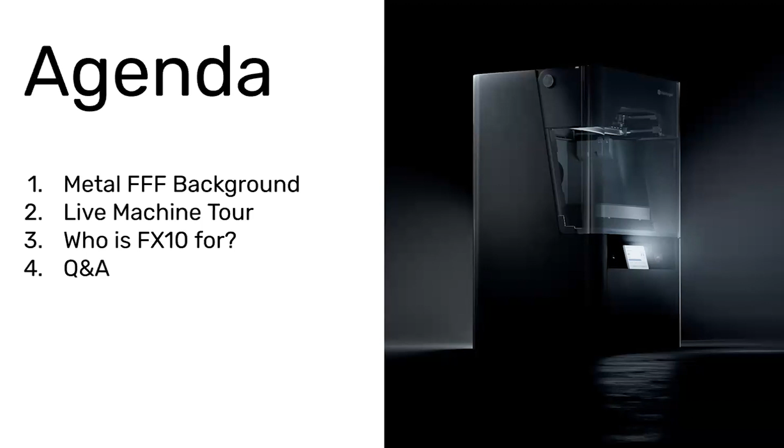But yeah, first to you, Nick. Yeah, so a little bit about how we got here. When you look at what had been available for metal 3D printing before we started doing metal filament-based printing, it was all million-dollar machines that take up large rooms, have major facilities requirements, big beds of loose powder. So there was PPE that had to be involved. It was difficult to make the process safe. It was a huge investment. We saw, as we were focused on providing solutions for the factory floor and powering manufacturing operations with tooling, jigs, fixtures, and MRO, that there was a need for lower cost systems that were safe, simple, easy to use. So that's what led us to invent metal filament-based printing in the first place.

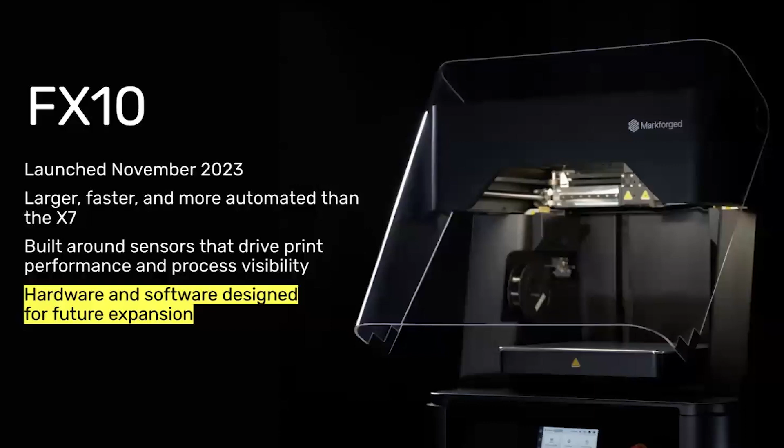FX10 is our latest hardware platform with sensorization, enhanced hardware that allows us to whip around the gantry faster while maintaining accuracy, and a host of automation features. We launched this to the world as a composite printer at Formnext last November, and now coming here, we're making good on the promise we had been communicating. Last time Daniel and I spoke about the FX10, we talked about how we really made it future-proof, but being pretty tongue-in-cheek without really exposing exactly what was going to come. Now Harrison and the team have made it real so that we can talk to you today about printing metal and composite on the FX10.

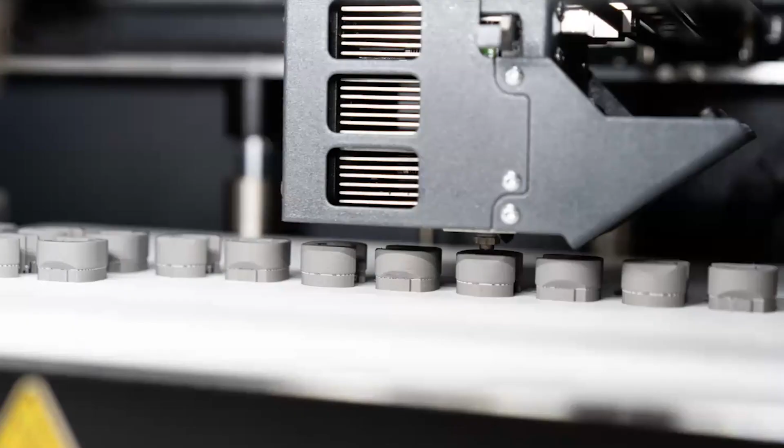So when we said hardware and software designed for expansion, modularity, and all these things, we're specifically talking about this - moving from just a composite machine to a machine that can do both composite and metal. Where I think we're really going to see the value come through is being able to expand the applications you're able to go after on the factory floor. We've seen a lot of customers over the years go through this journey of starting with industrial composite machines, starting with an X7, realizing the power that can now be harnessed with functional parts used for tooling and holding thousands of kilograms by adding fiber reinforcement, and starting to push that and move into metal over time when they started to see A, the value of additive on the factory floor, and then B, that there were applications they couldn't go after yet because they needed even higher performance with temperature, higher strength, corrosion resistance, wear resistance - applications that simply required metal.

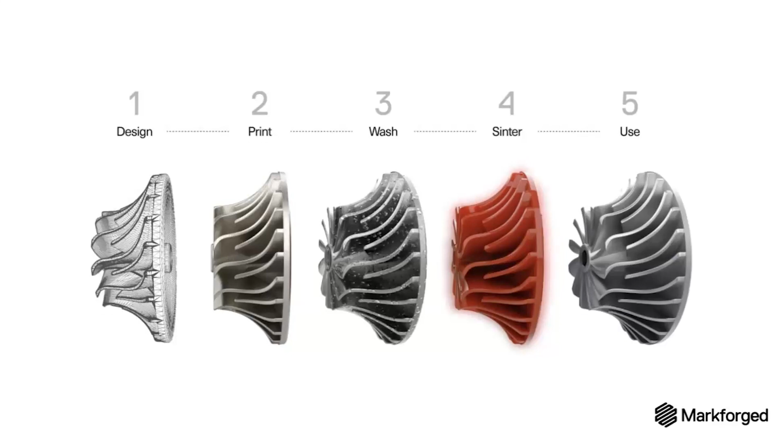And the metal process that we use here is really a 3-step process: printing, which starts with the filament that we have here. That's a metal powder that's bound with a wax binder, so there's no actual loose powder. You handle it with your hands, you don't need any kind of PPE. You load it into the printer just like you normally load a spool of filament.

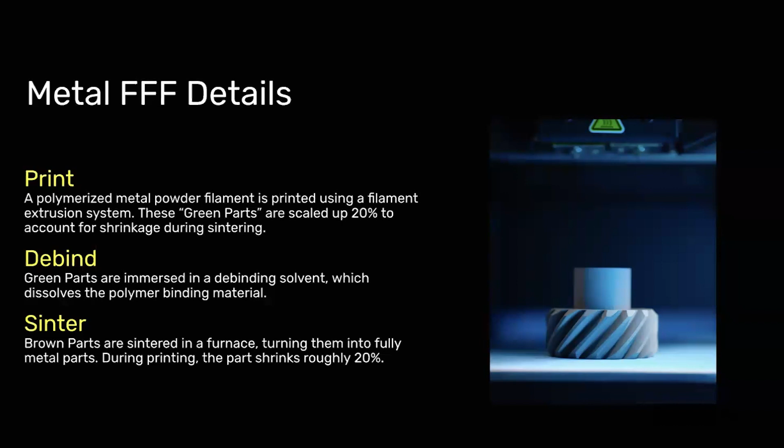After printing, which is the same FFF technology you're used to, where it's a lot like a glue gun on a gantry going layer by layer depositing filament, you have this green part where it still has the wax binder inside. We have two additional steps after that: the wash step, where we use a solvent bath to wash away 98% of the wax binder still in the part, and the sintering step, where we utilize our furnaces to basically cook that powder metal part into the final metal part.

You'll notice here there's a scale factor with this. These parts are the same part, printed and sintered. That's because parts of that filament are not metal, so as you sinter, the part actually shrinks about 20%. The most common question we get is, do you have to account for that? The answer is no, we scale it up for you.

But yeah, so this is the system: print, wash, sinter. We've been selling this package for years now and have built up a lot of experience with it. Previously this was with our Metal X machine, a system specially made to print our first generation of metal filaments. There was a lot of innovation that went into that which Harrison and the team were able to port over and power up in the development of the FX10 that we'll definitely dig into.

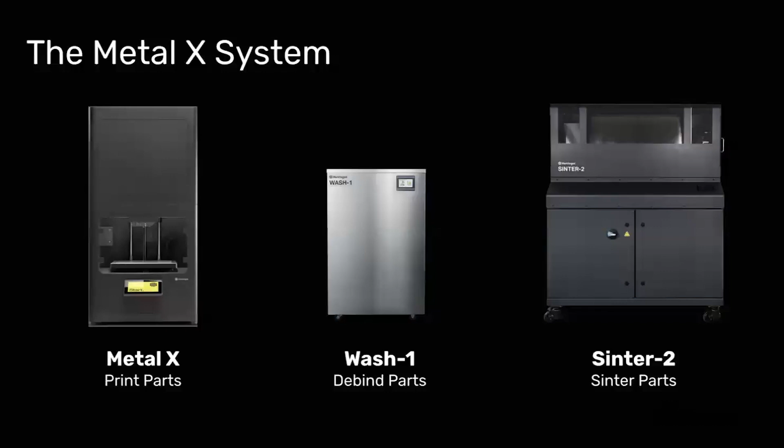That wash system right there, that's where the solvent bath is. And then the Sinter 2, that's our high running sintering furnace, where we're running at high temperature and controlling the gas flow that goes in there with inert gas, and that's ultimately what gets you to that final metal part. So, a three-step process.

I'll note that the Metal X, while being highly specialized, was developed as an offshoot of composite printers. So we started with this as a composite printer company. The metal kind of came away from that and became its own thing. And the real reason for that had to do with the feedstock itself, right?

Yeah, absolutely. When you look at the process, print, wash, sinter, you'll probably recognize this is a page out of the book from metal injection molding. In that case, the only difference is the actual printing process. When the team here first developed metal filament, that was a huge challenge, and one of the things that came out of it was the material itself was quite brittle in raw form. You can see it up above the printer in the chamber here on the Metal X.

Harrison, why don't you tell us why the filament is up top, how that helps with the Metal X, and what's different now? As a lot of people probably know, composite material is moisture sensitive, so it obviously wouldn't work in the setup we have pictured here above the heated chamber where you're printing parts. On the Metal X, the system was set up that way because you needed the filament to feed directly into the printhead. Otherwise it was too likely that the filament would break because of how brittle it is.

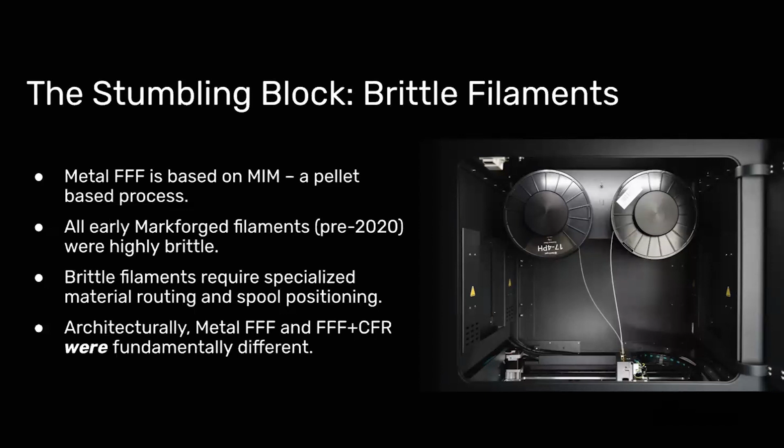This kind of answers the question a lot of people have of, well, why haven't we done this in the past, why haven't we had a composite and a metal system? It's because they were basically incompatible with each other. You couldn't put composite filament that's moisture sensitive in the chamber above where you're printing, and you also couldn't put metal filament previously in a spool bay or a Pelican case, because it would break in the path as you were trying to print at those speeds.

So when you think about this, it started as an evolution of composite printers, but what became is something totally on its own, and we spent years figuring out how to print this. At some point we realized that MIM feedstock, which is optimized for pellet form—super easy melting, running into mold, super high volume—isn't necessarily the exact same. We happen to have some pretty great material scientists here, so we pursued our own solution, right?

Yeah, exactly, and that's Daniel talking about our V2 metal filaments. You can see here they are dramatically more durable, even just in filament form, being able to tie it in a knot like this. This exceeded our expectations when we set out for development. There were a few pain points we wanted to solve with that first version of the metal filaments—since it was brittle, you had to be really careful even when you were just handling it out of the printer.

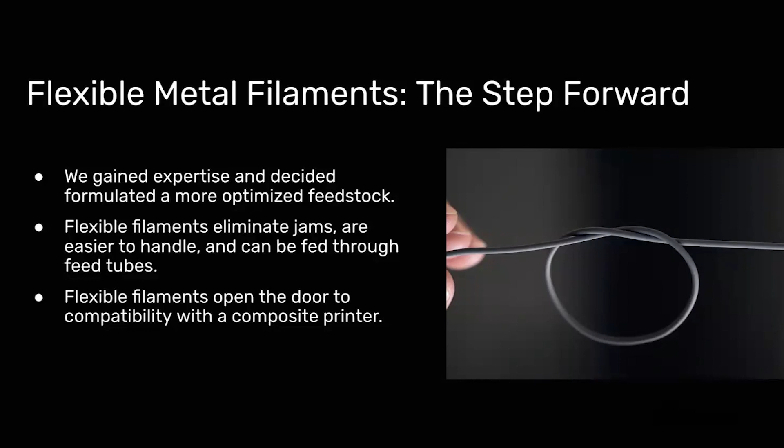And when you saw it in the upper chamber on the Metal X, it also had to be heated. We would preheat it so that it would be a little bit more durable, and that's what allowed us to print it at all. But now it's much easier to handle and much more durable, so it can be more robust for the printing process. And I know that was critical for your team, Harrison.

Yeah, absolutely. I think one of the biggest challenges we faced is how do we take this filament that's kind of like a rope, how do we feed it into a head effectively, and how do we make sure it stays intact so we can print fast parts without breaking this filament, or breaking the final part. This step towards these flexible filaments was a big and necessary first step in that process.

Yeah, and I think there might be a question: how are these filaments flexible? They're metal, right? So think about it this way: these filaments are 60% or more by volume metal powder, but the thing binding the metal powder together is the actual binding polymer, like a wax. So mechanically, they behave as the polymer binder, not as a metal part. So when we're talking about flexibility, we're not making the metal powder more flexible, we're talking about the binding agents that make it a filament. When you're printing a part, what you're really printing when melting and extruding is that binding agent. The powder is kind of along for the ride.

So what that means is, one, it's really difficult to do, because a high percentage of your media going out the nozzle is frankly useless with respect to being an FFF printer. But the other side is that the binder can scale across metal powders. So if you figure out that binder, adding new metal powders and materials and bringing them across the line makes a lot of sense. And if you look at what we did over the last 4 or 5 years, we've really done that.

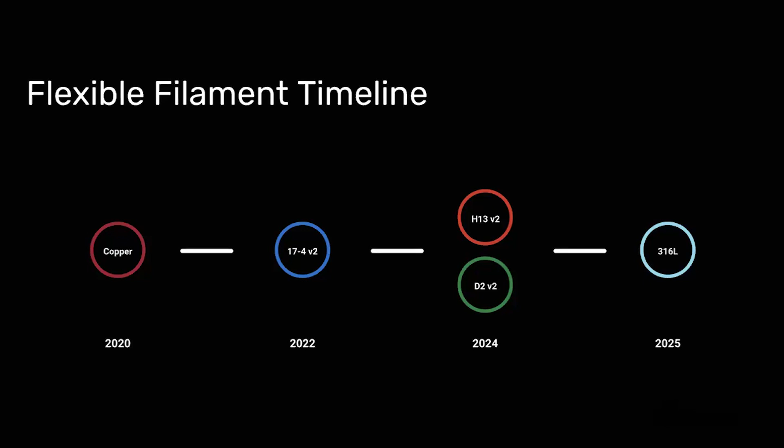We were able to speed up the printer, print faster, and print more precisely. So what we did with these flexible filaments, and why it's such a big step forward, is that although they're still very different from printing plastic, they are closer to plastic than the initial ones were. And that opened the door for this.

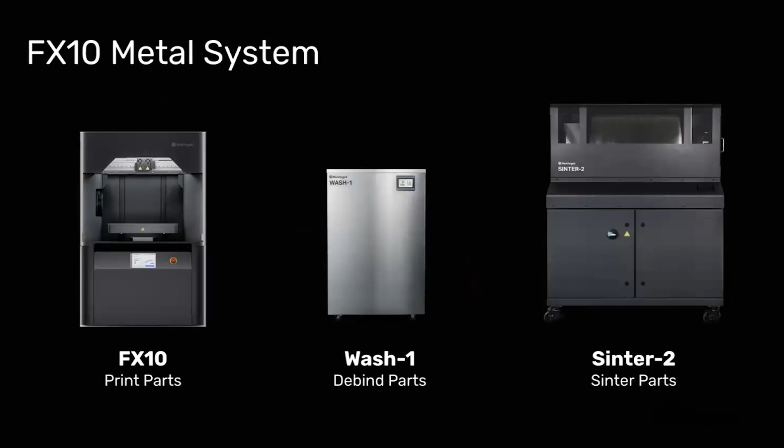Exactly, being able to print both composite and metal on the FX10. The system otherwise is the same, the wash and the sintering furnace. So our customers who already have a Metal X, a wash, and a sinter are now able to add an FX10, and use that for composite bandwidth when they need it. Then when they need more metal bandwidth, they can do that with the FX10 as well, filling up that sinter faster to drive down operating costs on sinter runs by reducing gas costs per part.

Like we've talked about, we changed the first step of the system, which is a very critical step, but we still have a proven rest of that system. So we're not reinventing the wheel, we're not going crazy over the top. We're just trying to optimize the use case for that wash and sinter, and trying to make sure we improve that important first step on these great products out there.

That's a good way to think about it, because most engineers know you try not to change every variable at once. But when you start a fully new process, everything is variables. When we first launched Metal, it took us some time to figure that out. Now we feel pretty confident about the debind and the sinter, and we think we have a process that works. So swapping out the printer and the way you're creating the green part shouldn't be, and from our experience will not be, disruptive to the process itself. Partially that's because the FX10 as a metal printer is unbelievable.

Yeah, I don't know if you want to start. I would love to talk about it. Let it rip, man. All right, so the FX10 as a metal system is really something that, at least personally, I get very excited about.

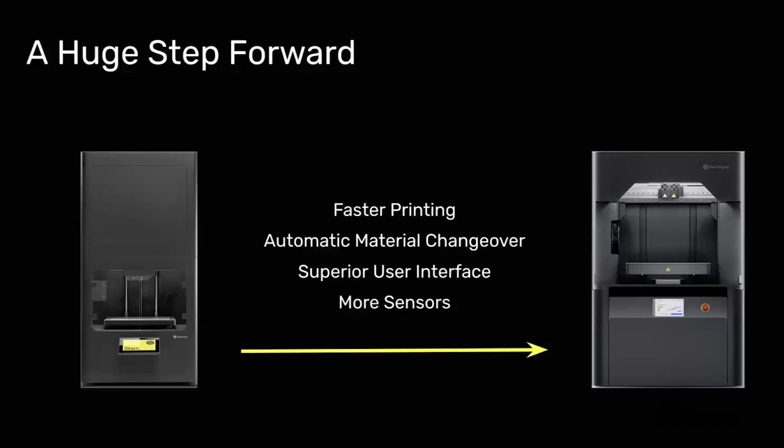Our user interface, we've spent a lot of time trying to optimize how as a user you experience the process of printing. We've tried to make it as seamless as possible so that you're just pressing print and then you've got your part at the end. I feel like we've really done a good job with this, especially with the number of sensors we put in the system to maintain a well-functioning system. Even if we expect something might need maintenance soon, we'll let you know ahead of time, so you don't have to wait for a lead time once it fails. We're trying to predict that ahead of time so you have as much uptime as possible. It's definitely a special machine.

So faster printing - historically we've sold that package, the Metal X with wash and sinter, for customers running a lot of metal. They've bought what we bundle as a 3-1-1, which is 3 Metal X printers, a wash system, and a sinter, because at the rate we were printing, that was how you'd optimize the process to fully load the sinter regularly and drive down cost per part. At this point, with the 2x print speed on FX10, the most we'll practically sell is a 2-1-1 bundle, because of the print speeds.

Harrison mentioned larger build volume and automated material changeover - those really go together, because now you can pack the build plate full of parts, do a large batch. You won't need to manually tend to it to make sure the next spool is loaded, and operate the system a lot more efficiently, bringing more value with just one machine.

We spent a long time overclocking the Metal X to go as fast as it humanly could. I think the Metal X as it currently exists is about 4 times plus faster than when we first launched it, and this is twice as fast as that - that's the level we're talking about here. Just for reference, this part in my hand, which fits in my palm, is pretty large and prints in about 7 hours. I know from experience that back in 2018 that'd have been a day and a half print. That's the level of throughput and speed-to-part that fundamentally changes with this type of machine, but it's also been a bunch of steps in the right direction over time.

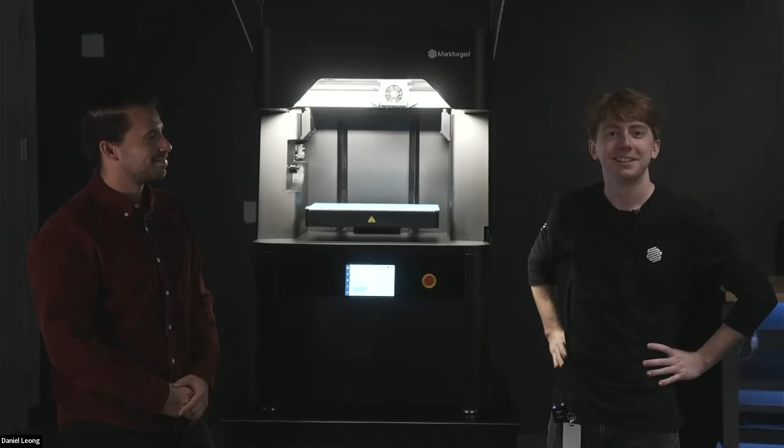So looking at the system, for those familiar with the FX10 as a composite system, it looks very similar. Starting at the top, as far as things that are different, we have a separate metal print head. Unlike the composite print head, where we have one composite nozzle and extruder and then a fiber nozzle and extruder, here we have our metal and our ceramic release extruders and nozzles. So we're able to provide strong parts that come out of this left nozzle, with a ceramic release nozzle that's able to help if you have complex support geometries or anything like that.

And for users of both composite and metal, what's the experience like for removing the print head? It's super easy to remove. There's just 2 cables to unplug at the top, as well as the feed paths, and then 2 screws. The overall change process of going from metal to composite and vice versa, I think there's 3 screws in total that you have to change. So we really wanted to make it as easy of a transition as possible. I'll talk a little later about ways that we even removed the need to change between components when going between them.

From the print head, you can see, unlike the Metal X system, the spools are not above the head. They go through a feed path right above the print head, and it runs all the way down through a routing block in the back and then down to the pre-extruders on the bottom. Before we get down there, we do recommend that customers change the purge bins because we want to avoid cross-contamination. A lot of the things that we're changing here, like the feed tubes, the print head, the purge bins, it's all because we don't want any contamination between the metal and the composite printing process.

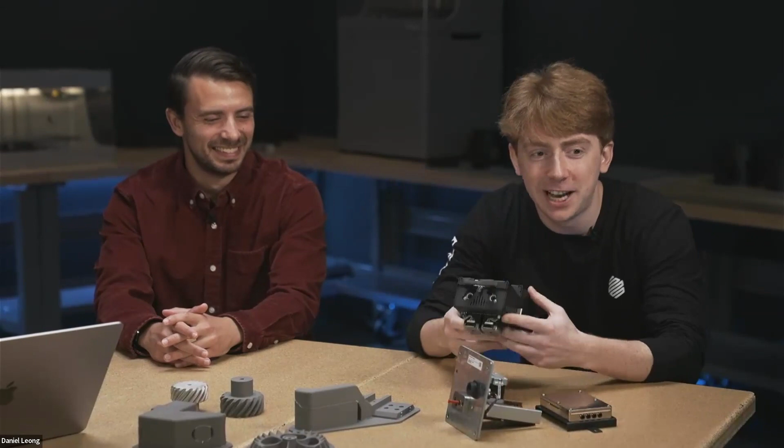All right, so right here, I have an FX10 Metal printhead. Obviously this is kind of the heart and soul of the FX10 Metal kit. It's the biggest change that we have, because it's what drives metal printing.

We spent a lot of time working on the printhead, and a lot of times there are misconceptions that the metal kit is just a printhead. It is a small kit, it is a few things, but there are still other critical components we've worked on. The printhead is the heart and soul of it, it's what's controlling, it's how we're able to maintain faster extrusion speeds. When we built the entire system, we built it with metal in mind, but we couldn't do metal without this printhead. So that's one of the most important things.

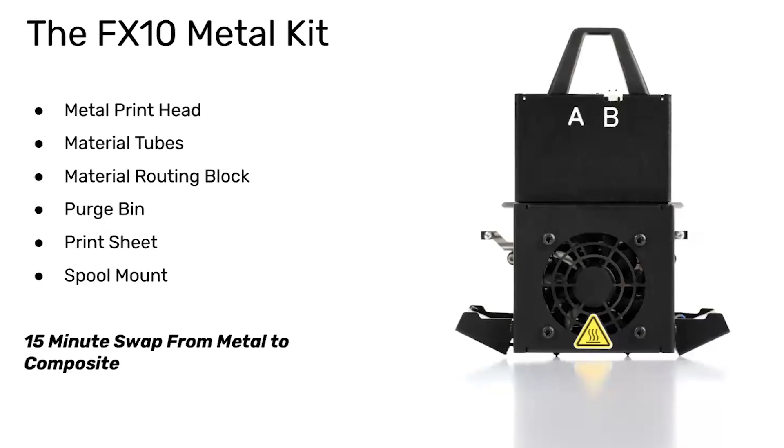There are additional things like material tubes, purge bins, but as far as critical components, one big thing that's definitely needed is the routing block. This is important because on the base system, there is a 4-to-1 routing block, since you have 4 spool bays going to the printhead, and you could run Onyx or other materials through all 4. Because we need ceramic, it's important to change out the routing block so you have a metal side and a ceramic side, but it's super easy to change out.

The way it's designed, it might be too small, but there's a little hole here, and all it is, is a loosen of a screw, a slide off, and a clamp on. So it's a super easy changeover. It's not a complex process to get the routing block installed, and it's very intuitive to change as you're changing the feed tubes.

And then one of the things we talked about is how cracking the code for metal and composite together had a lot to do with the filament. But there's still big differences between composite filament and metal filament. Metal filament is much weaker as far as your ability to crush it compared to composite filament. So trying to run metal filament through a composite extruder would typically result in you either deforming or crushing the filament in a way that is non-recoverable.

So with that in mind, we have this pre-extrusion system to feed filament to the printhead. We could have just said, all right, there's a composite and a metal pre-extruder, that's part of the swap, but we didn't like that user experience. We said that's adding too many steps to the swap. So we developed the dual pre-extruder. This one might be hard to see, so I'll try to point very precisely.

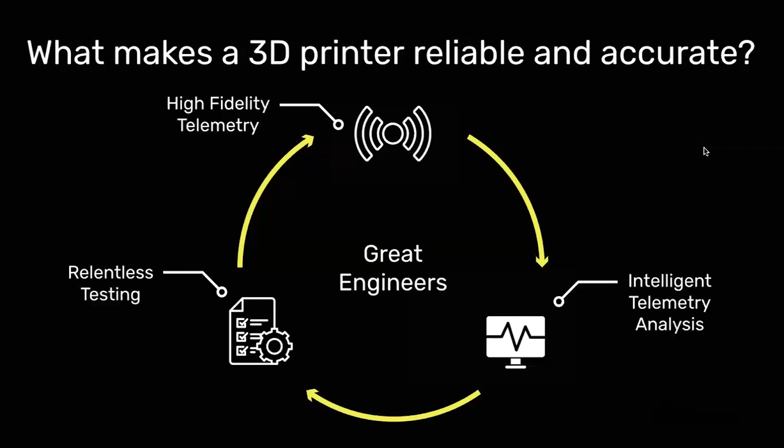Yeah, I think we're a little behind schedule, but it's all good. The point of this was to talk about the metal printer, so I'm glad we got a good detailed look. I'm gonna go super quick on this, and then we'll still try to give you guys 15 minutes for questions on all this stuff with the FX10. I see we already have something like 20 questions, so we're fighting a losing battle if we're trying to answer all of them, but we'll do our best.

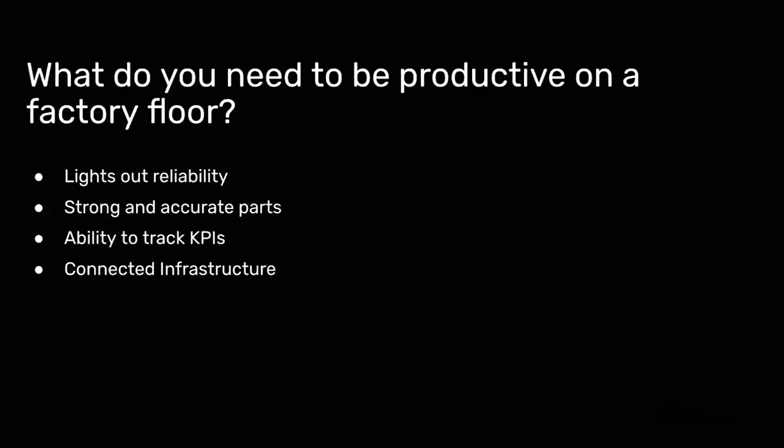First, let's quickly talk about who FX10 is for, why we developed it, and why we think specifically for manufacturers this is a really interesting solution. So let's start with the question: what do you need to do to be productive on a manufacturing floor?

A machine, additive or not, needs to be reliable. It needs to yield strong parts that are also accurate. You need to be able to track the KPIs of the parts you integrate, and you need to be connected to whatever infrastructure. If you're missing these things, it doesn't mean something isn't valuable or interesting or useful, but it means your ability to actually integrate it and see value out of it is greatly diminished. We talk about this idea that a 3D printer often kind of sits in the corner of the factory and just does stuff.

And that's a cool thing to think about, a cool mode for 3D printing to be in. But the reality is, if that's what you're doing, it means you're not actually maximizing the value being put in. So you really need all of those things together. And if you can't trust the printer to yield strong and accurate parts, well, what's the point?

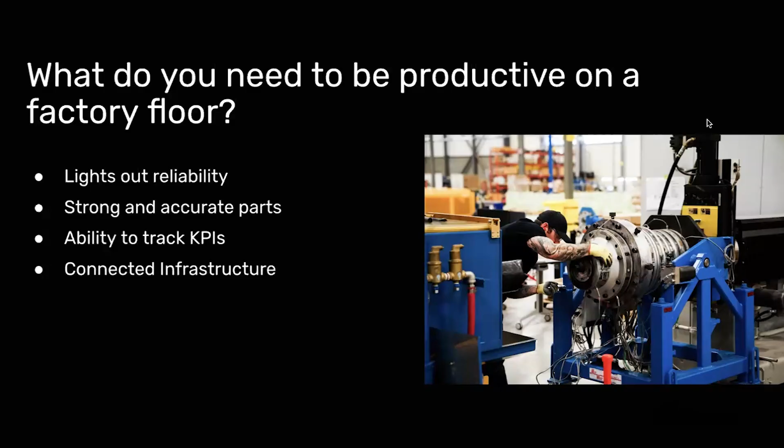It's just a toy. So when we think about metal and composite on a fundamental level, they complement each other. They really excel at different things. That's not to say metal is just better than composite at everything, or composite's better than metal at everything—they have different strengths.

When we think about composites, they can print relatively large parts. We're kind of beating around the bush here with respect to throughput, but we really don't need to. Metal X or Metal FFF process-wise has a maximum part size that has more to do with the physics and the sintering process than the printer itself. Composites are better for large parts.

If you need a part that has design compliance—you need to beat it up and it needs to flex and not break—composite's better. Non-marring, composite is better. And generally composites are cheaper and faster than metal, because metal is still a three-step process. The last thing is that as-printed tolerances on composite are almost always going to be tighter, because your process on metal is three steps.

And so even if you print a perfect part, sintering is a process where shrinkage happens, and we try to be realistic about what the tolerancing is—we generally say near net shape.

On the other side, metal excels in places where it's simply metal, right? If you need something ultra high strength—carbon fiber is strong, but it is not as strong as steel. If you need something really hard, we print D2 tool steel that gets up to 55 HRC—I don't know the exact value, but it's well up there when you heat treat it.

Likewise, abrasion resistance: if you're thinking about production tooling and doing thousands or tens of thousands of cycles, it might work perfectly the first time, the thousandth time, but maybe the 50,000th time it's worn away enough where composite wouldn't hold up as well.

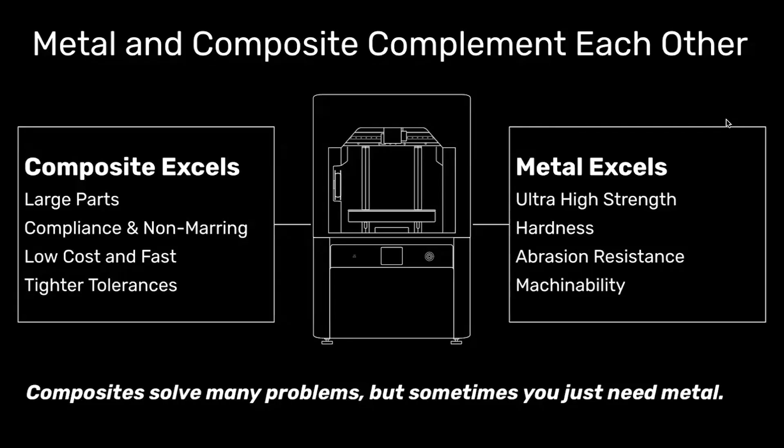Harrison hinted at what we're getting at here, which is mapping these to applications. This is a very reductive view of what the applications are, but I want to talk about it quickly to give a big picture of why it's impactful to have both.

On the composite side, here are three applications that make a ton of sense. End of arm tooling has always been the killer application for composite parts. They are high complexity, and being able to customize a part can cause performance improvements on a line. Often we think about 3D printing as replacing cheaper, faster, but this is replacing for higher performance on the end—lightweighting, combining multiple parts into one.

Another huge group is conformal work holding—everything from soft jaws to welding fixtures to assembly fixtures to CMM inspection check gauges. Having something that's able to grip conformally increases your ability to perform, and it might be something you need to machine, and machining conformal stuff is a real pain.

The last thing is factory aids. Factory aids are the type of tool you see everywhere, hard to define as a single thing, but critically important to a factory running, and extremely expensive to make.

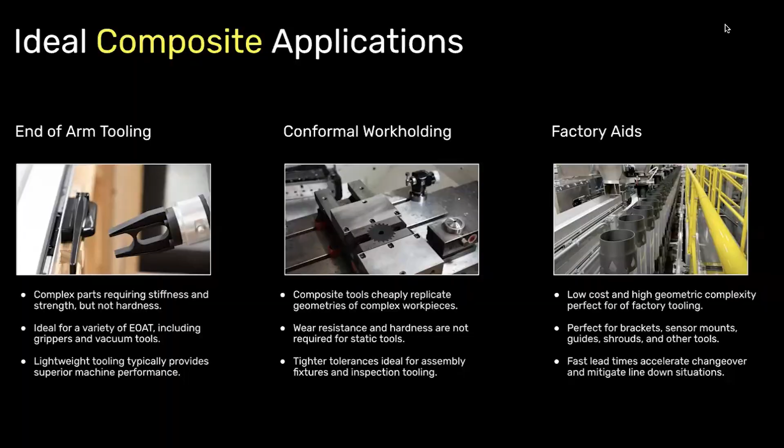The fast lead times on composite make changeover faster and mitigate line-down situations. If something breaks and you can print a replacement in composite really quickly, that's where composite is advantageous.

On the metal side, the applications get a little narrower, probably because the part cost is more expensive and the constraints are tighter, but when you hit the right application, it's super impactful. These three are really super specialized tooling.

This is a fish descaler on the left. In some tools, you just cannot optimize, and you need additive to be able to optimize. They might have internal channels, or super complex geometry that wouldn't work any other way, or something you can only 3D print. For these tools, it can be super valuable to print them.

Even though the tool cost is higher, the ROI is much higher. Metal's durability and robustness in these cases exceed what you can hit with composites, enabling you to access applications you otherwise wouldn't think about.

The other two are smaller application spaces but very interesting. Complex prototyping, if you have the right parts and really need them to be metal—we talk about composites as a functional prototyping thing, but if the function you need is abrasion resistance, hardness, or temperature resistance, the part is metal and you need to prototype it in metal. Metal 3D printing is useful there.

The last is super high mix end use parts—these can be super high fidelity parts. This example is Guhring, who makes end mills. They're able to take on new customers because the end mills they're making are too low volume and too custom to justify the tooling required.

By printing the tool bodies and then brazing carbide tips, they're enabling themselves to make tens of a tool instead of hundreds or thousands. That enables them to open up new business lines and make more money.

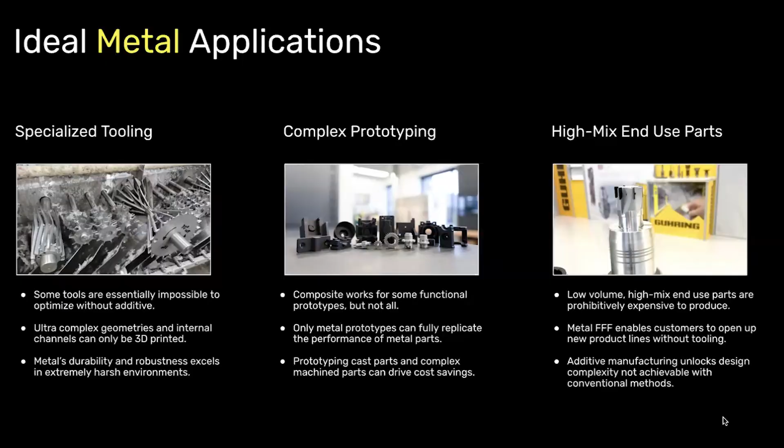And so these are kind of the three spaces for metal. But what I really want to talk about with a little bit more time, so we can give time for questions before we finish up, is the holy grail of both of them, which is hybrid parts. We talk about metal and composite separately, but in reality, the combination of them is far greater than the sum of its parts. There's a ton of different application spaces where tools and fixtures especially need the best parts of both metal and composites, but are inaccessible if you don't have both.

Examples of that are tools with hardened wear pads, where the tool does not need to be fully metal. Metal is expensive, metal is inaccessible, but there are parts that contact the workpiece that do need it, because otherwise the composite part's going to get shredded. It's not really going to work effectively in application.

Tools where you can leverage the precision machinability of metal to print a custom metal insert, or something where the face of the part is highly precise, but you still have a body of the part that's composite. And then the last one I'll talk about is you can utilize the non-marring aspects of composite and print metal tool arms so that it's a highly robust tool with swappable wear pads.

Nick, I know you see a lot of factory lines. How do you see these hybrid parts really optimizing people's workflows? Yeah, one great example that comes to mind is from one of the largest automotive OEMs in the world, and they were optimizing their line because they wanted to make it more ergonomic and reduce cycle time when installing some of the bolts on the axle assembly onto the final vehicle. This is a customer that's actually a power user with composite, and they started out doing this with Onyx and carbon fiber, but found that their operators are doing this function 1,000 times a day, and that's one where they were having the problem with wear resistance, and were able to replace it with 17-4 V2.

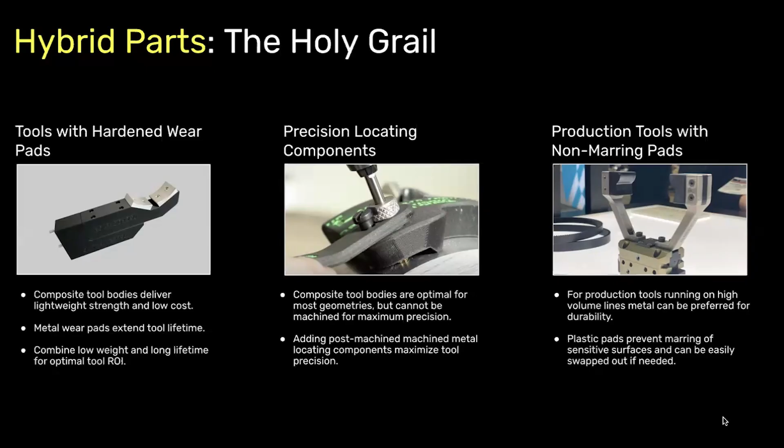For sure. Yeah, I think when you think about using these together and leveraging, I hate to use the word synergy, but the synergies between them, it is a legitimate place where it makes sense. And the last thing we'll say before we open up to questions is this.

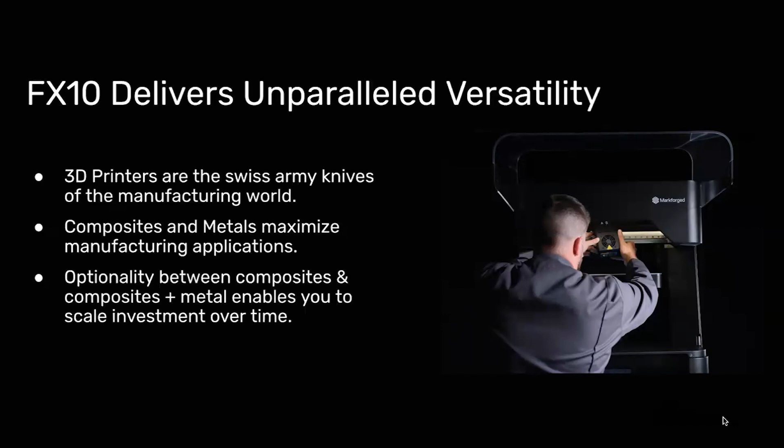We talk about FX10 as kind of the most versatile tool for your factory floor. When it was just a composite printer, I think that was a little bit of a stretch, not in that it wasn't highly versatile, but there were things that it couldn't do. But now when you think about this machine, and 3D printers broadly, as Swiss Army knives, well, this is the only machine out there that's printing both composites and metals. That means that you can do all these applications we talked about, you can cover each other's weaknesses in application, and probably last and most importantly, there's optionality here. You can buy this as a composite printer, or you can buy this as a composite and metal printer.

Yeah, no, and I'm super excited to see, because I expect that there will be a lot of customers who get the composite system and they get super excited about it. And like you said, they find, actually, wait, maybe I do need metal. And I'm confident that as customers get this, they're only going to see more and more value coming out of it. 100%. Yeah.

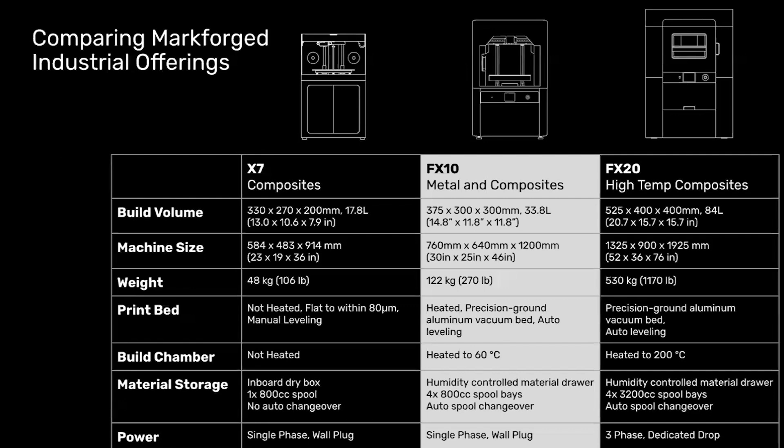So I think now we have one kind of reference slide, if you want to screenshot, this is our industrial offerings right now. You have X7, you have FX10, you have FX20. X7 is a composite printer, it's been around for a long time, it's highly reliable, it's a great machine. FX10 is the one that does metal and composites. And then if you need high temperature composites for aerospace applications or super crazy composite tooling, this is somewhere where FX20 comes in.